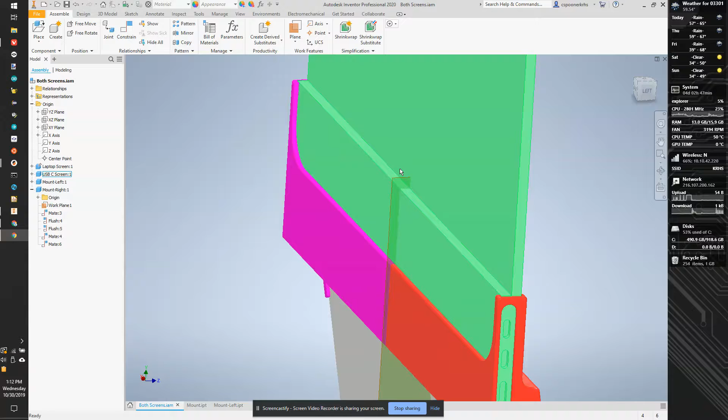So the first thing I'd like to do is I want to make these so they're not symmetrical anymore. I'm going to make little pegs that are male and female so they register with each other. So it makes it really easy to line the two pieces up.

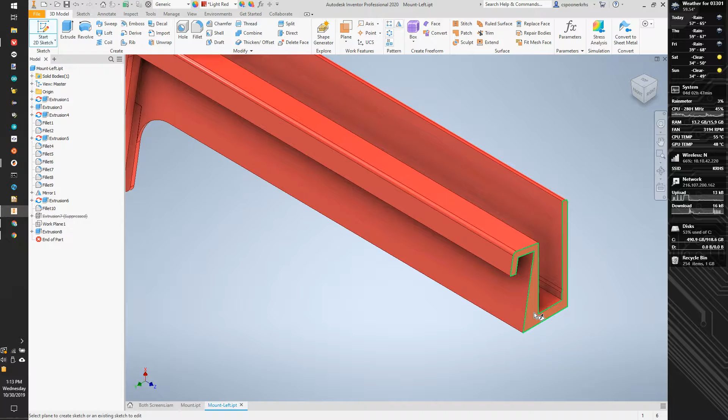So I'm going to start off by going to Mount Left. And we are going to turn the visibility off on this plane just because it's ugly. And I'm going to start a sketch on the end of this. Now these are kind of thin, so we're going to be sort of clever how we build our things. I'm a big fan of using the slot tool because that gives you a direction and a thing.

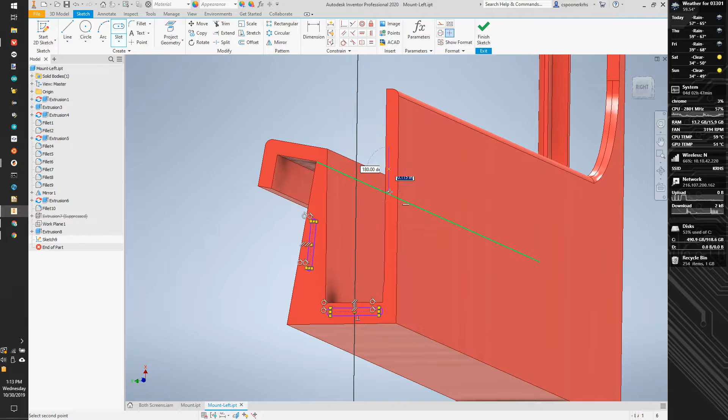So I'm going to put one there, one here, and probably one here. Now, we need to size those and set them. But first of all, I'm going to make this one parallel to this side here. I'm going to dimension this to be, I don't know,

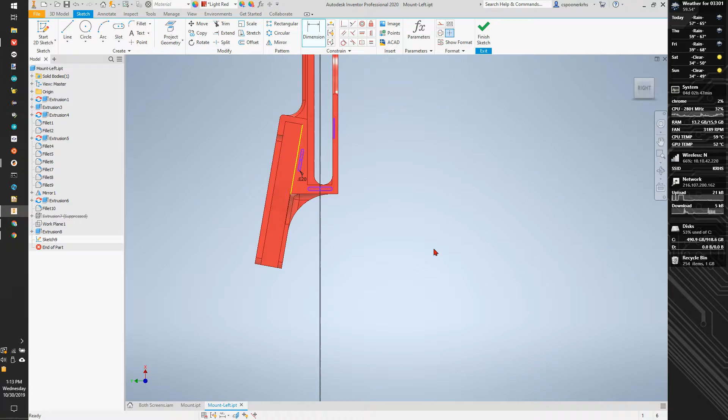0.05. Ooh, it just went crazy. Control Z. Sometimes Inventor does that. If you set a dimension, it'll try to scale things to make it fit, and that will move things around too much. So I'm going to start dimensioning stuff beforehand. So I want that to be 0.5. I want to pick nice even numbers here.

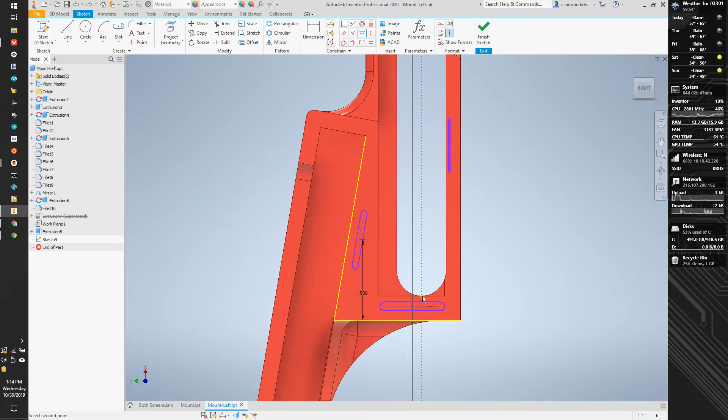I'm going to center this one about the end of here. Control Z. And I'm going to center this one about this side here. I also want to take, and I know I want this thing centered here. This distance here is some number. I'm just going to accept it. And this number here is some number. I'm just going to accept it.

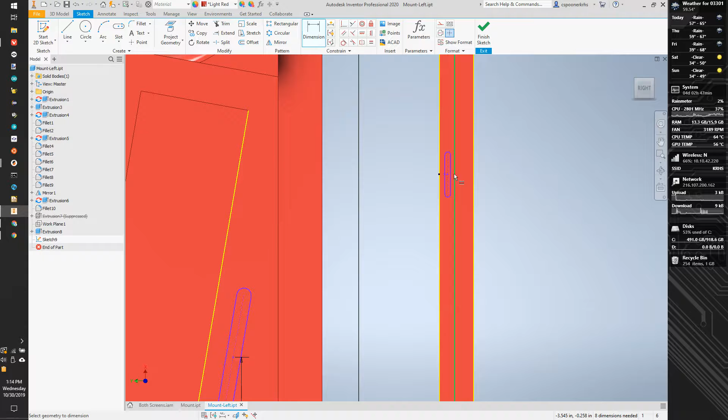And I'm going to now dimension this from here to here to be this number /2. And I'm going to set this one here to here to be this number divided by 2. Now let's go back and set this dimension here. 0.05. 0.05. And 0.05. Nope. So let's go 0.035.

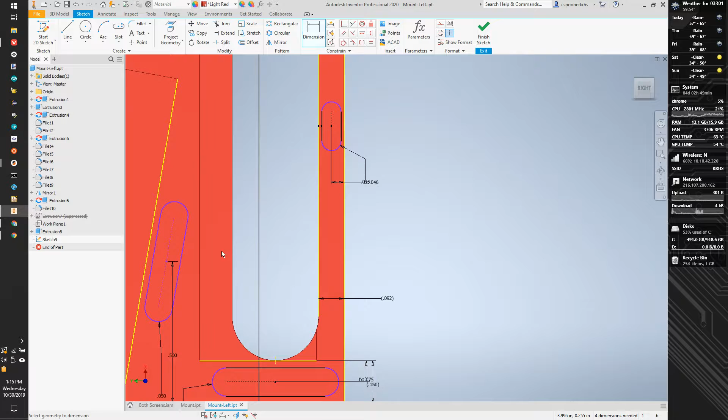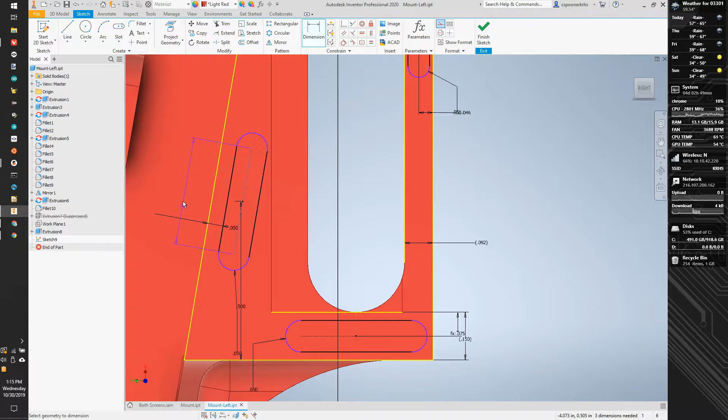Now I'm going to dimension this guy from here to here. And I'm going to set that to like 0.05. That looks good enough. I didn't dimension the lengths here, so I'm going to dimension this. And if I want a real dimension, I can right click and get an aligned dimension, and it'll give me the overall length, not just the X length. 0.3.

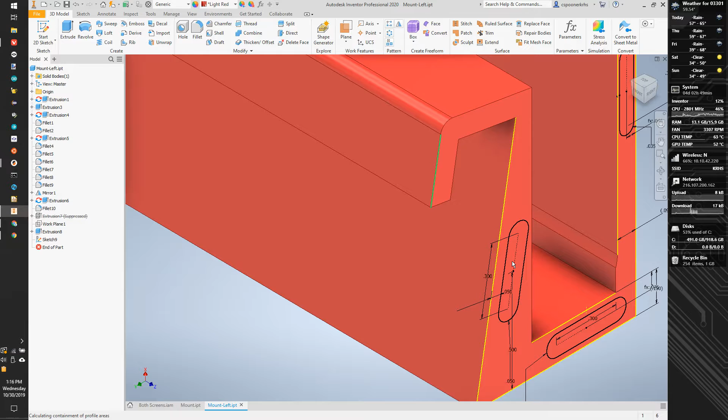Now these numbers are kind of arbitrary. They don't really matter. What matters is that when we do the other one, we pick the same values. So I'm going to finish sketch. I'm going to make all three male. And we're only going to go out 0.1 and 0.05. Make sure I actually pick valid numbers.

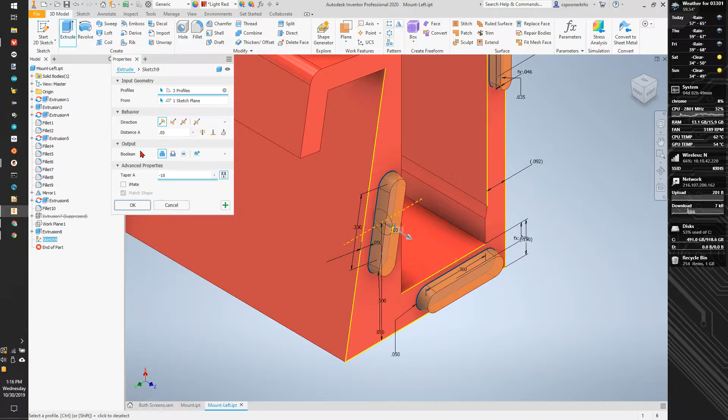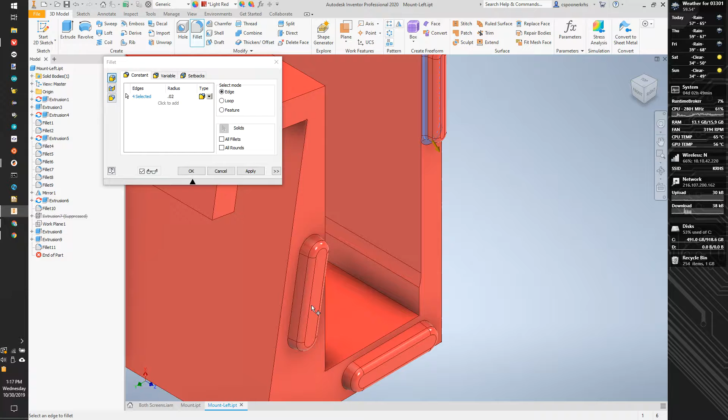And I want to add a taper, a negative 10-degree taper. And it's going to make these sort of keys that automatically self-align. And that gives me a lot of room when I'm trying to plug stuff together. I'm now also going to add a fillet to the outside here, and here. Probably a fairly small number, like 0.05. Nope, let's go 0.02. And I'm going to add a similar fillet to the bottoms. Probably 0.01. I want to be not past the edge.

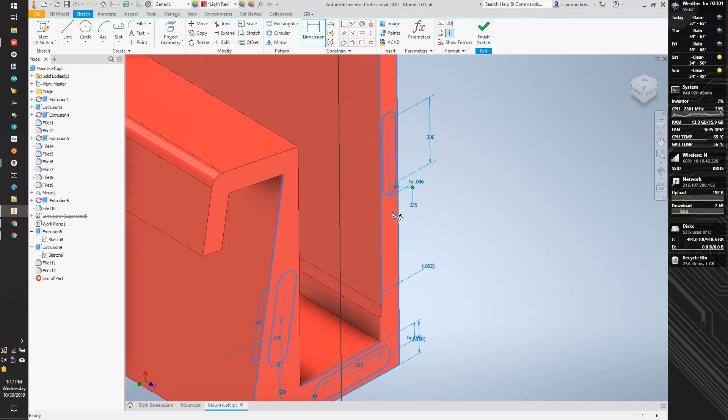So now, when we make our next thing, we're going to make the area slightly larger. We're at a small tolerance. Actually, let's go back to that last sketch. Let's do the tolerance on the small side. That usually works a little better because they're already close. So I'm going to go to each of these values here. And I'm going to subtract off 0.01. Copy that string.

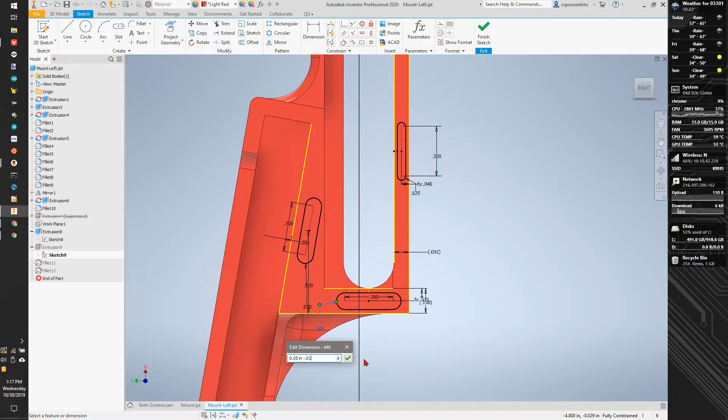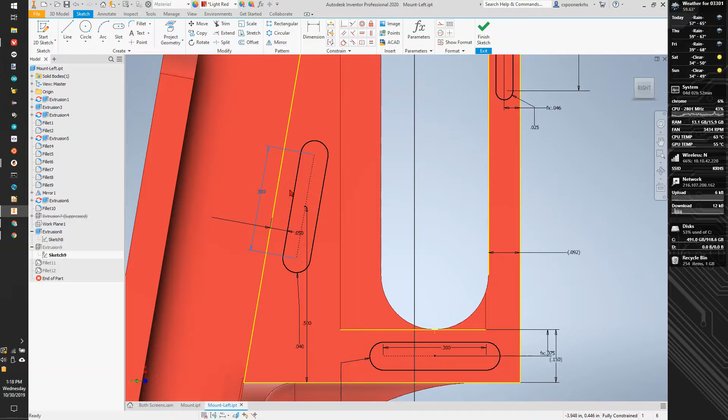That's going to shrink them just a hair. We should probably do the same thing in the lengths. Nope, don't have to, just the radius, because the radius will shrink it in all directions because it's a radial dimension. So finish sketch, accept, and our fillets might have died. I'm going to go back to this fillet, and we're going to make it smaller. Let's make it 0.015. Now I'm going to save this,

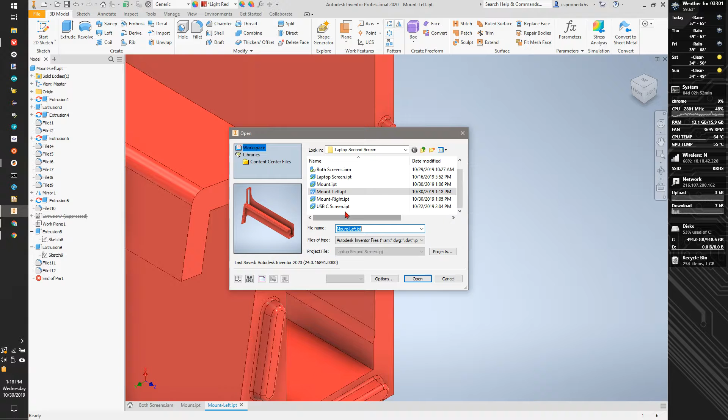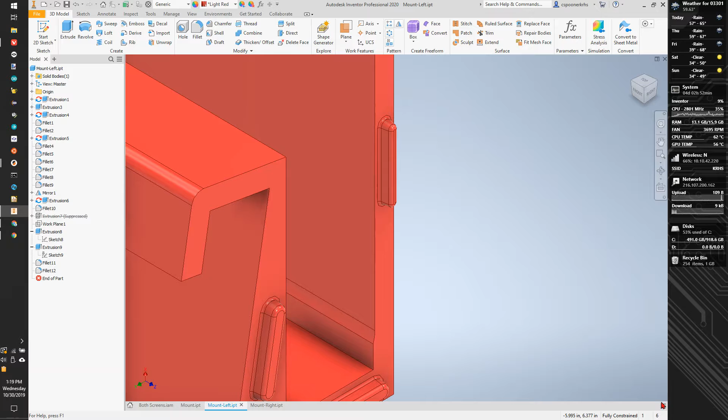and I'm going to open up Mount Right, and I'm going to hide this work plane and start a sketch on this surface here. Now, it'd be really nice to be able to see both of what I'm doing at once. So if I click on this number here, I'm going to also check that. And then I'm going to go tile vertically. All right, this shows me all my things.

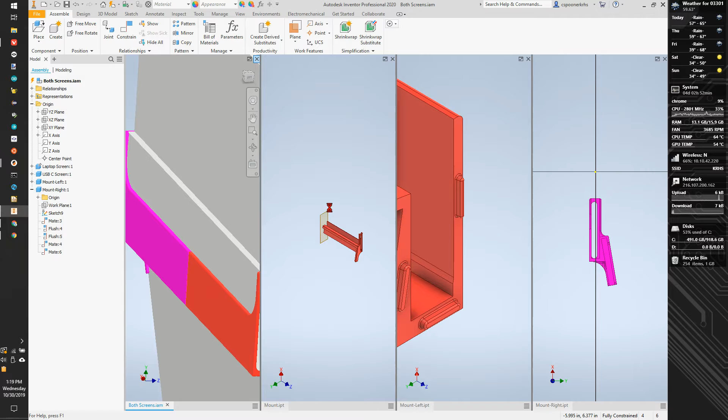I'm going to close this one. I'm going to close this right now. Save changes. Yes to all. Hit OK. Yes to all. And I'm also going to close Mount. In fact, before I do anything else, I'm going to delete this feature, because if I ever get a large enough printer, I won't have to do all this work to split it. It makes the whole project much easier. Now I can see my two parts side by side. This is going to make making the other side really easy. We'll see that in the next video.